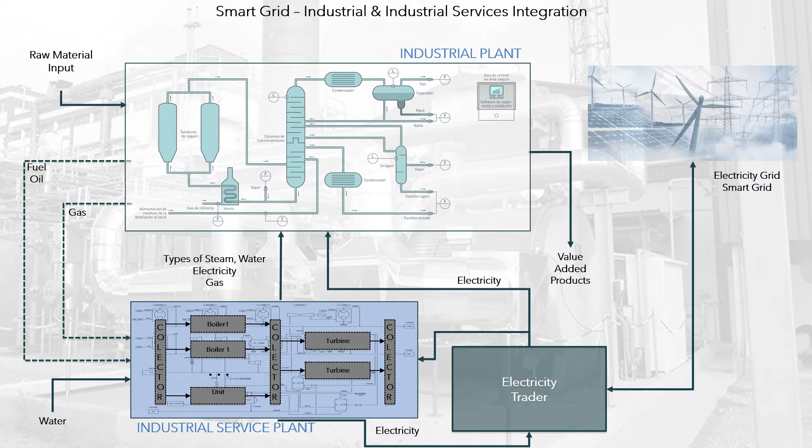Continuous and binary variables are defined for the proposed model. For instance, continuous variables represent the flow rates between the units, whereas binary variables denote the operating state of the unit, on or off. These variables are defined for every period t of the horizon considered.

It is assumed that the units and external sources, for example electricity concessionaire, can complement internal generation, and therefore supply the sets of variable demands in each period.

Description of the utility system. The figure presents the simplified flowchart of the Recap Central Utility System, in which each unit connected to utility header UT is represented by a rectangle that contains its identification.

This configuration considers only the systems that are subject to optimization. The initials used to identify the entities of the system are J pumps and ejectors, GV or L furnaces and boilers, M heat exchangers, O or P vessels, TF valves, and V blowers and compressors.

The utilities that are considered in the optimization problem are superheated steam, V30S, saturated steam, V30, and its condensate, CV30, 5 bar steam, V5, and its condensate, CV5, and 1 bar steam, V1, and its condensate, CV1.

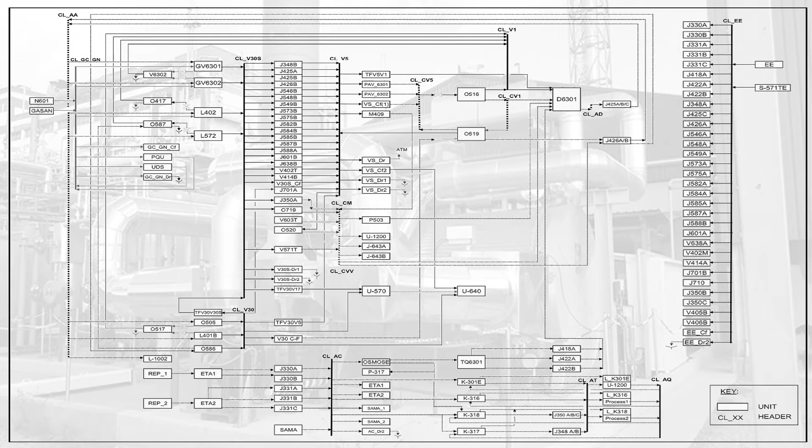There are also two other headers for condensate, that are CVV and CM, which originate from the vacuum system, of the process condensation turbines. The images present the indexes and sets used in the model.

Therefore, units with fixed operation do not need to be modeled and their operating variables are simply included as parameters that are calculated from material and energy balances.

For a given header of utility UT, their aggregated values are given as a summation in the term denoted UTCF. An example of the simplifications introduced to represent the headers is shown in the figure.

For the case of the V30S network, each unit is represented by a rectangle that contains its identification, and it is associated to the branch that symbolizes the process area to which it belongs.

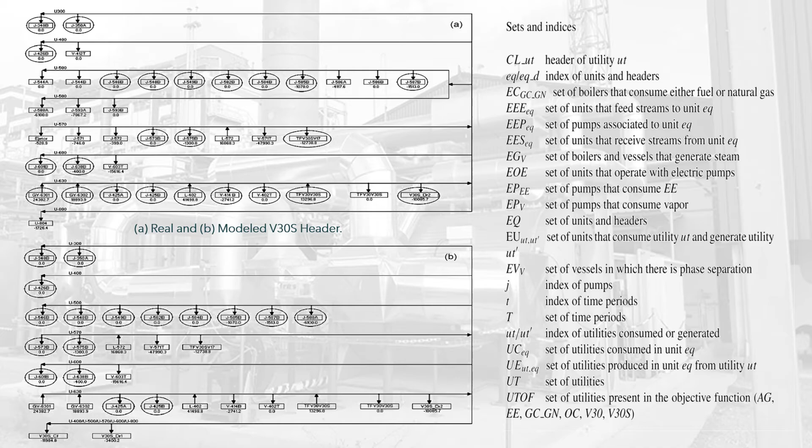The minus sign under each rectangle indicates V30S consumption, whereas the plus sign denotes its production. Figure 2b shows the modeled system.

The variables used are presented in the image on the right side. They are identified by their first letter.

E continuous energy flow rate, Q continuous heat received from external sources, which is only positive for the boilers, 0 for all other units, V continuous volumetric flow rate, Y binary, equal to 1 if unit operates in period T, 0 otherwise.

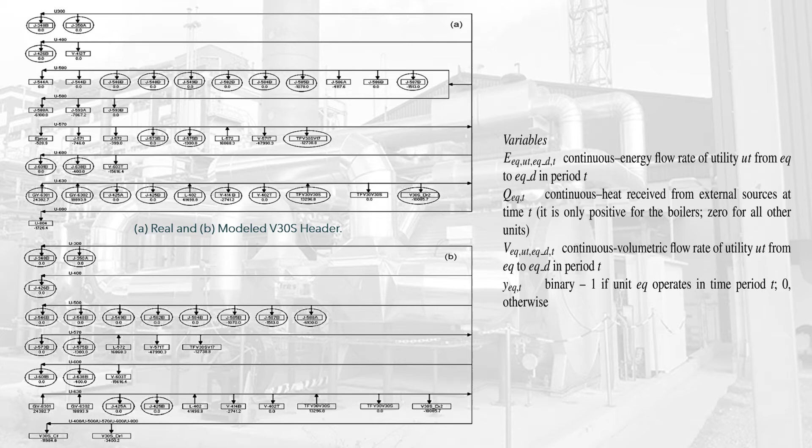If a unit produces utility UT, it is sent to its corresponding header. Similarly, if utility UT is consumed in a certain unit, it is sent from its corresponding header.

The figure generalizes this idea for every header of utility UT, denoted by CLUT. In this figure, the utility stream UT that is generated in unit EQ is sent to header CLUT at time t with flow rate VEQ UT CLUT T.

This header receives all the streams of utilities that are produced in the same time period from all EQ that are mixed at the temperature and pressure conditions of the header. Similarly, header CLUT sends utility UT at time period t to consumption units.

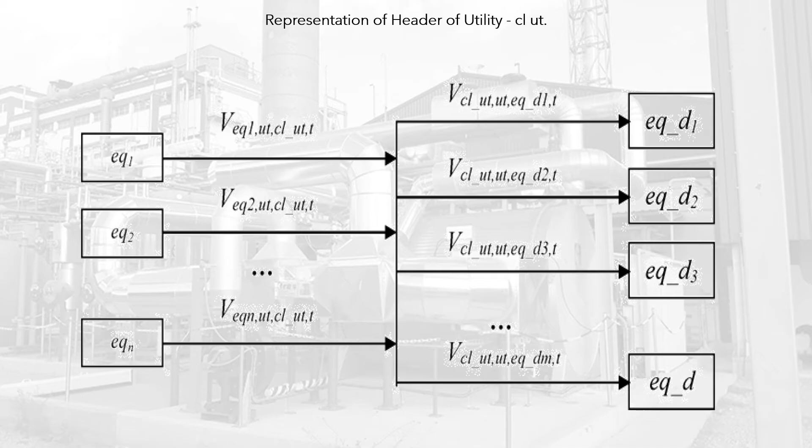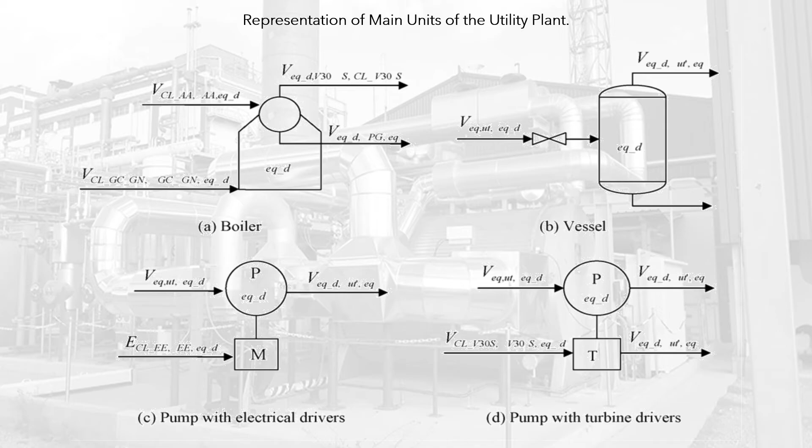A decision variable YEQT is associated with flow rate variable VEQ UT EQD T. The image presents the main service units included in the model: boiler, vessel, pump with electrical drivers, and pump with turbine drivers. The cases presented are applied to single period operation.

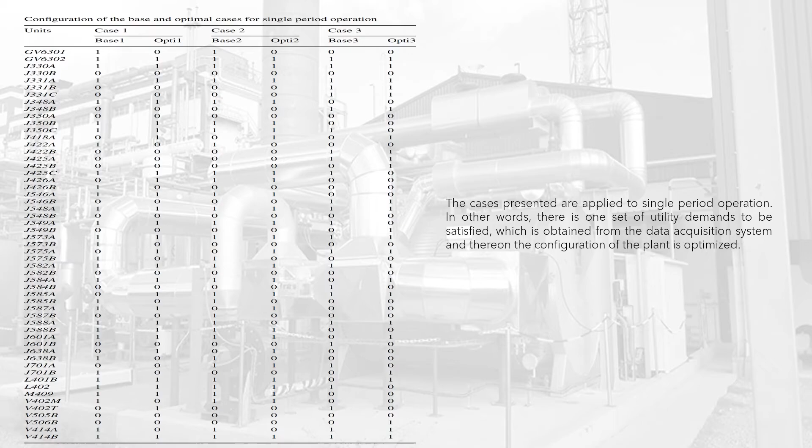There is one set of utility demands to be satisfied, obtained from the data acquisition system, and thereon the configuration of the plant is optimized. Different single period scenarios are considered.

Firstly, the model was validated to verify consistency of the formulation, basically by eliminating the degrees of freedom and providing reference values for the economic objective function as well as for the operating conditions of the optimization model.

For this reason, 3 base cases were developed: base 1, base 2 and base 3, that correspond to 3 different operational conditions of the plant.

Cases base 1 and base 2 correspond to operational conditions of the plant in typical days, without abnormalities. The objective in this study is to validate the model, and to evaluate the effect of the manual planning in the operation, in particular its economic impact.

Case base 3 considers an atypical situation given by the shutdown of U570, which generates a large portion of EE, as well as V30 and V30S.

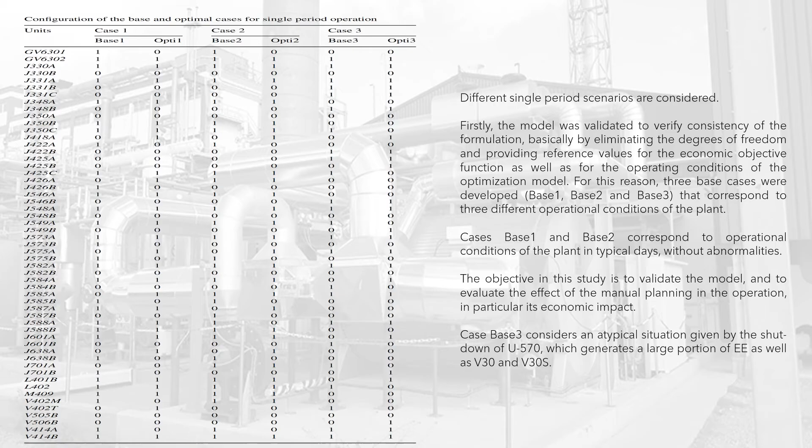The table presents the comparison of the base cases with the solution of the mathematical model. 1 means that the associated unit is up and running.

The examples show that lower cost alternatives are obtained with the optimization approaches. These alternatives would not have been considered in real-world operation, based on the configurations that are usually operated in the plant. Moreover, these are practicable solutions that satisfy the plant constraints and the set of utility demands.

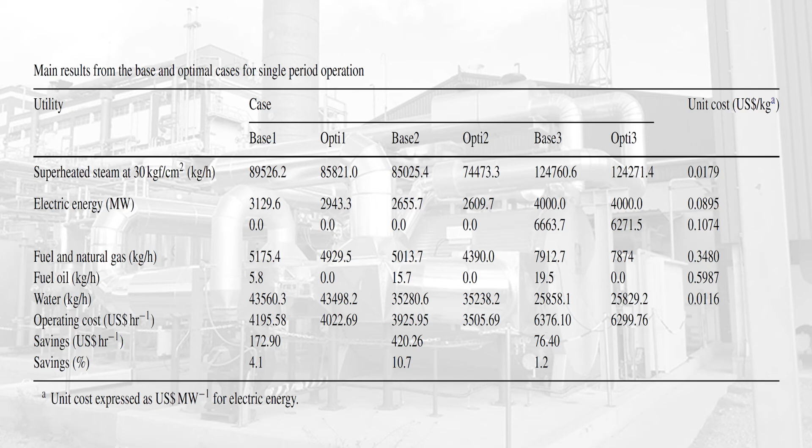In the Opti4 case study, the demand profile results from frequent operational abnormalities, such as the shutdown of Unit US3, loss in the electricity supply from the third-party concessionary that is responsible for 25% of the electricity demand, shutdown of the turbo expander/electric generator unit that satisfies part of the electricity demand, and the shutdown of the L-572 heat recovery boiler, which reduces the availability of the steam generated by the recovery of energy from the process.

Due to units' shutdown, it becomes necessary to relate all flow rates to, and from, the process units and headers, with binary variables that represent their operational state.

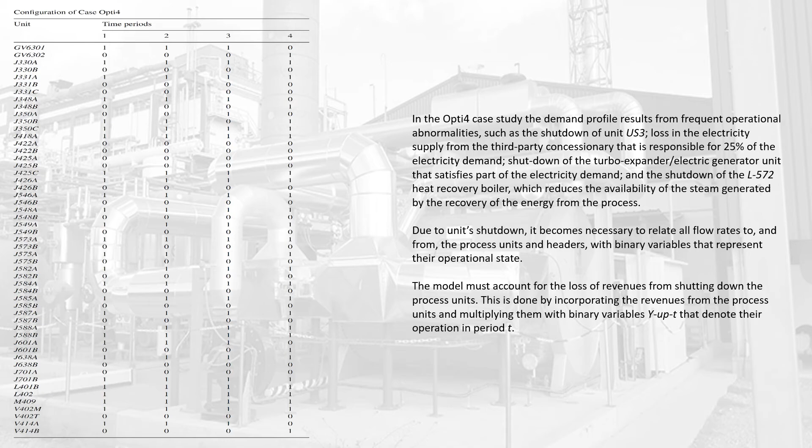The model must account for the loss of revenues from shutting down the process units. This is done by incorporating the revenues from the process units and multiplying them with binary variables that denote their operation in each period. The optimal solution for Opti4 is presented in tables, where the flow rates and operating state of the main units are shown for the 4 periods.

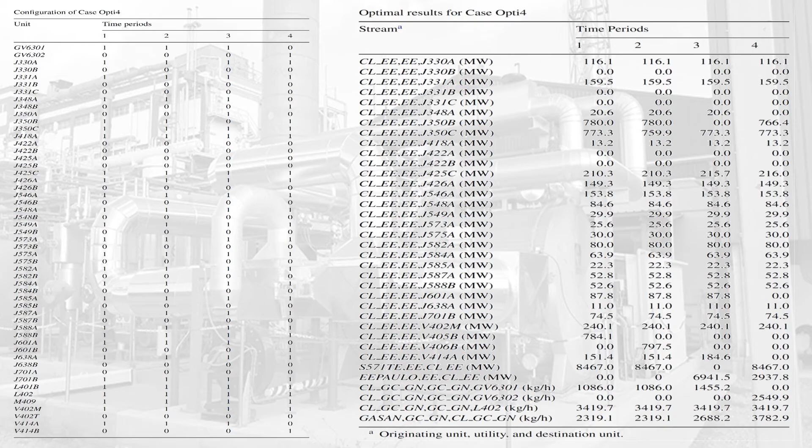It is important to note that in case 4, as there are many utilities involved in the multiple time periods, it is not straightforward to analyze the effect of abnormal conditions on the operation.

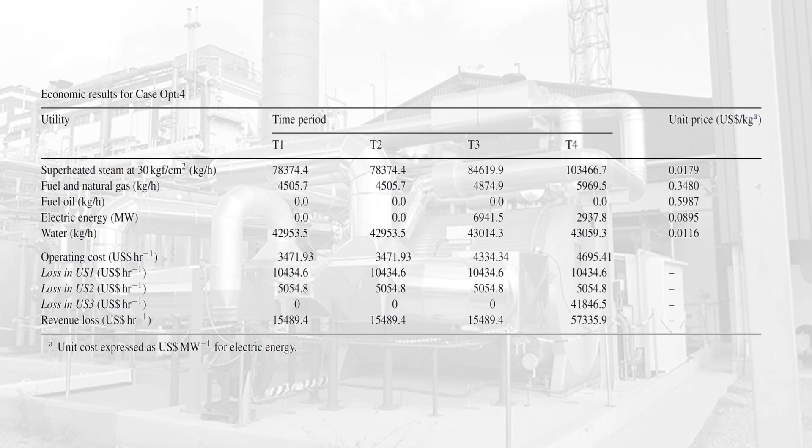The optimal operating costs obtained in time periods 1, 2, 3 and 4 are $3,472, $3,472, $4,334, and $4,695 per hour, respectively. The revenue loss due to the shutdown of Unit US3 was $41,846 per hour.

Finally, the last case study presented consists of a problem with 12 periods. For the first time periods, the data are the same as the Opti4 case, and from then on with variable utility demands.

The optimal profiles of the main utilities, electricity, superheated steam, water, and fuel and natural gas are given.

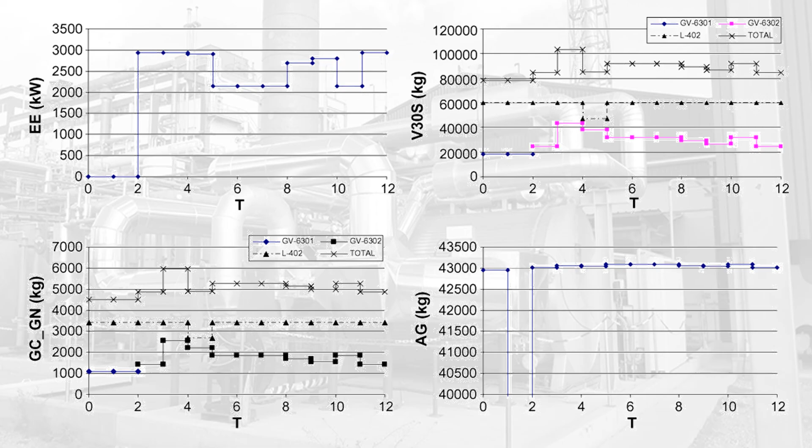The next step is to energetically integrate the system with the entire refinery, to further improve the operation of the system. More complex multi-period scenarios were studied that consider the existing flexibility in the industrial plant.

These correspond to changes in the operating conditions and in the configuration of the processes, interruption of electric energy supply from the local concessionary, equipment shutdown, for example, propylene unit, turbo expander electric generator, and results in a variable utility demand along the time periods, generating an average savings of 3 to 5%.

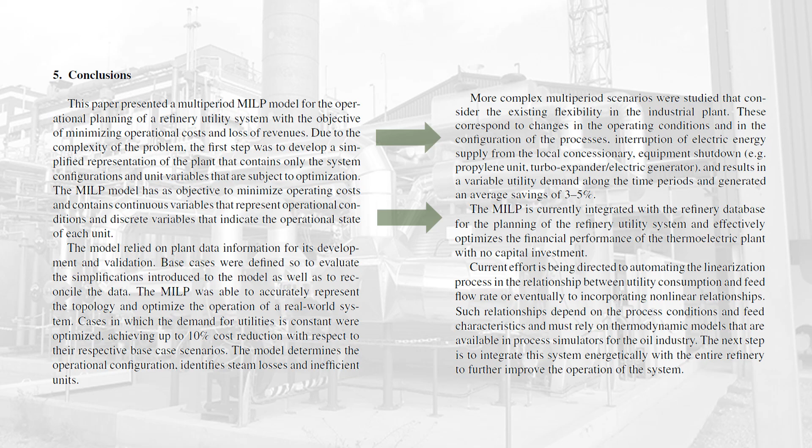The MILP is currently integrated with the refinery database for the planning of the refinery utility system and effectively optimizes the financial performance of the thermoelectric plant with no capital investment.

The Petrobras mathematical model can accurately represent the topology and optimize the operation of the real-world system under different utility demands and abnormal situations in single and multi-period scenarios.

The model is currently integrated with the Petrobras plant database and used for the planning of the recap refinery utility system, achieving up to 10.7% reduction cost in static optimization for redesign of the configuration of the service plant, and 3 to 5% average savings for dynamic operation of the integrated systems.